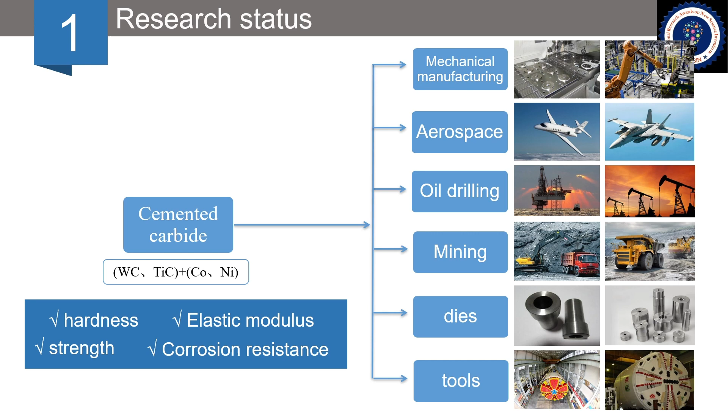Cemented carbide has the advantages of superior hardness, significant corrosion resistance, and abrasion resistance. Thus, it has been widely used in mechanical manufacturing, aerospace, oil drilling, mining, dies, and cutting tools. The rich tungsten resources provide an important resource guarantee for the development of the world cemented carbide industry.

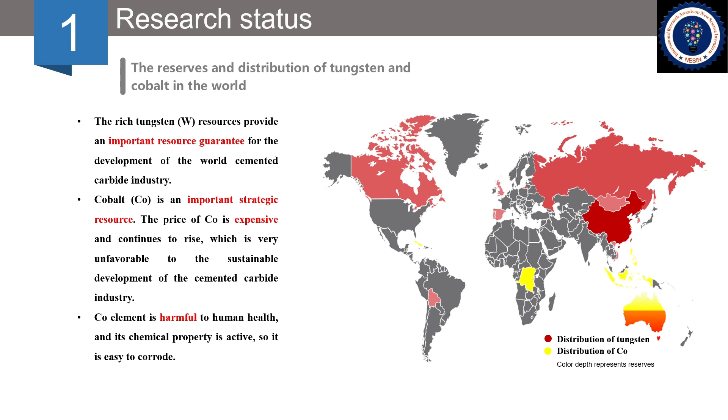But looking around the world, cobalt is an important strategic resource. The price of cobalt is expensive and continues to rise, which is very unfavorable to the sustainable development of the cemented carbide industry. And the cobalt element is harmful to human health, and its chemical property is active, so it's easy to corrode.

In order to solve these problems, tungsten carbide without a metallic binder phase was fabricated. Researchers added metallic carbides or metallic oxides such as titanium carbide, aluminum oxide, or magnesium oxide to the tungsten carbide matrix to improve its performance.

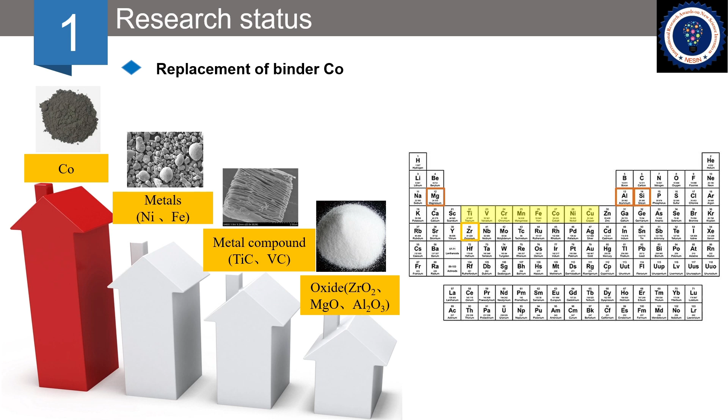It has been seen from this figure that scholars have gradually carried out research on substituting cobalt in recent years, mainly focusing on intermetallic compounds such as nickel aluminum, iron aluminum, and oxides such as aluminum oxide and magnesium oxide. Such research has been carried out around their mechanical properties and engineering applications such as cutting tools.

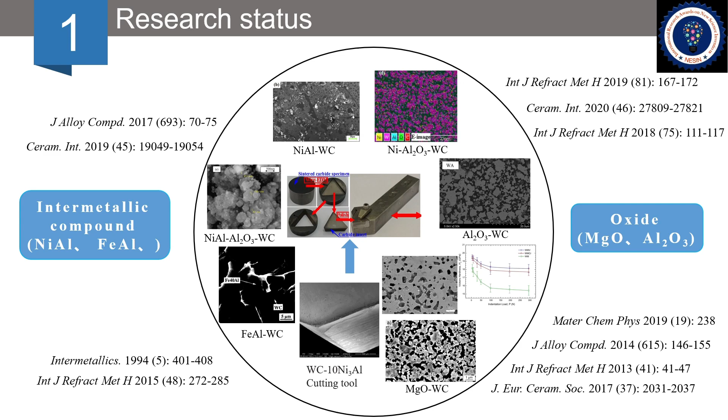For the preparation methods of composite materials, there are several main sintering processes as follows. Different sintering processes have different advantages and disadvantages as well as applicable materials, but to a certain extent, they can improve the density of sintered blocks, inhibit grain growth, and improve material properties. SPS is a superior technique for materials that are hard to sinter, such as ceramics, hard metals, metal matrix.

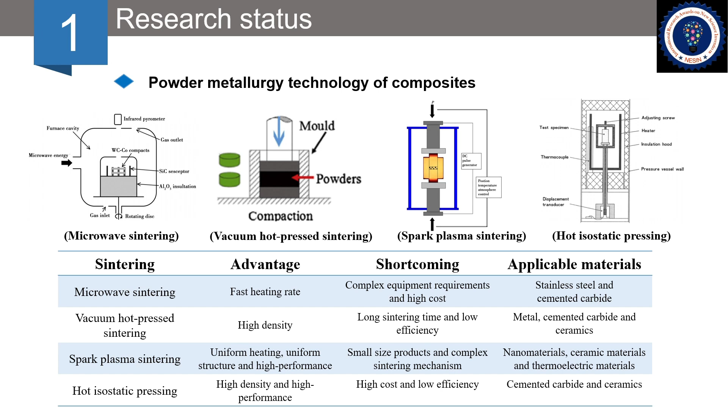According to the mass ratio of 10 to 1, the powders and cemented carbide milling balls were put into the container and mixed for 50 hours at 350 revolutions per minute in vacuum. Next, tungsten carbide and magnesium oxide composites are called WM composites for short.

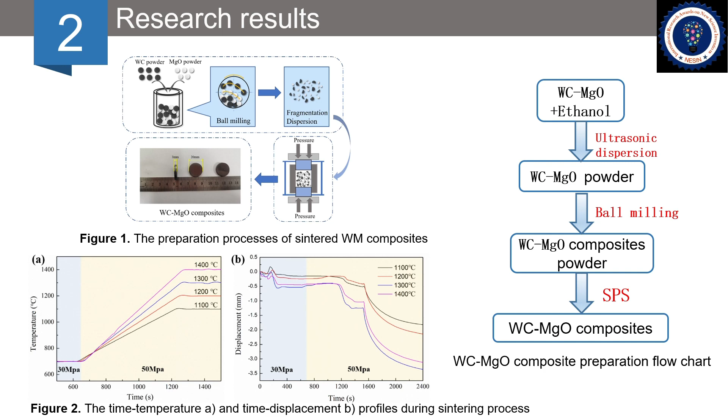SPS was used to prepare the compact WM composite under high vacuum conditions in the temperature range of 1100 degrees to 1400 degrees and the pressure ranging from 30 to 50 megapascals.

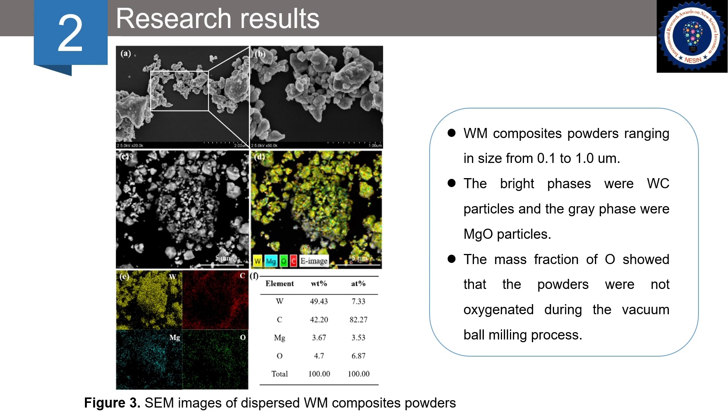Figure 3F showed the mass fraction and atomic percentage of 4 elements. It can be seen that magnesium and oxygen content were consistent with the experimental values. In addition, the mass fraction of oxygen showed that the powders were not oxidized during the vacuum ball milling process.

Figure 4 showed the X-ray diffraction patterns of A to D sintered WM composites with different sintering temperatures. According to Figure 4, tungsten carbide, magnesium oxide and the subcarbide W2C were detected in all samples. There was no peak of impurity phase, indicating that no significant reaction occurred between the tungsten carbide and magnesium oxide during SPS.

It was observed that tungsten carbide is the dominant phase from all the XRD diffractions. Meanwhile, it can be found that the amount of the W2C phase in WM composites increases with the increase of temperature.

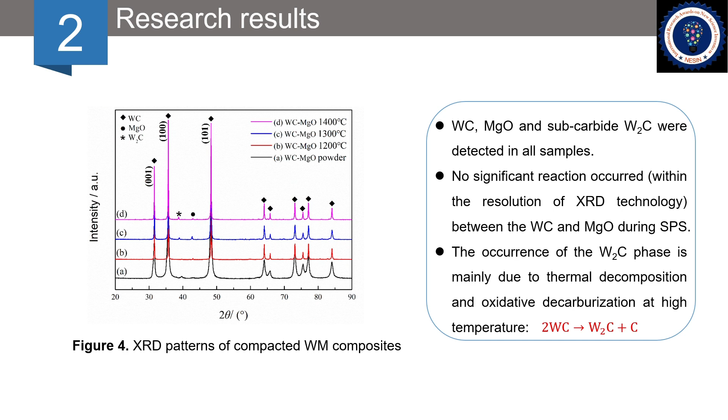The occurrence of the W2C phase is mainly due to decomposition and oxidation at high temperature by the following equation.

The formation of the fine grains may be related to the SPS process. Compared with traditional sintering methods, the SPS process promotes sintering of powder particles through electric discharge and spark plasma. Meanwhile, the applied extra pressure helps strengthen consolidation while limiting grain growth.

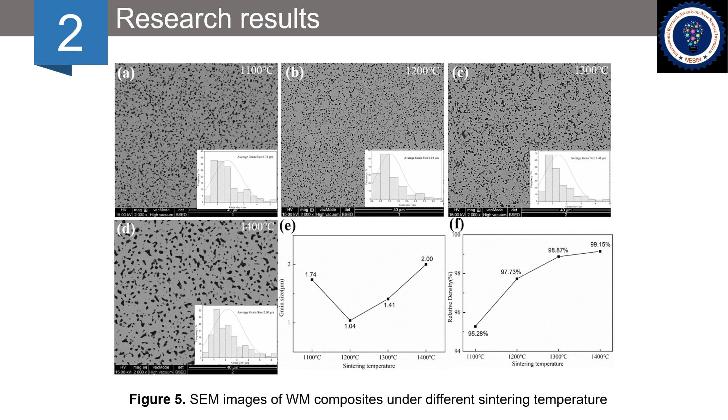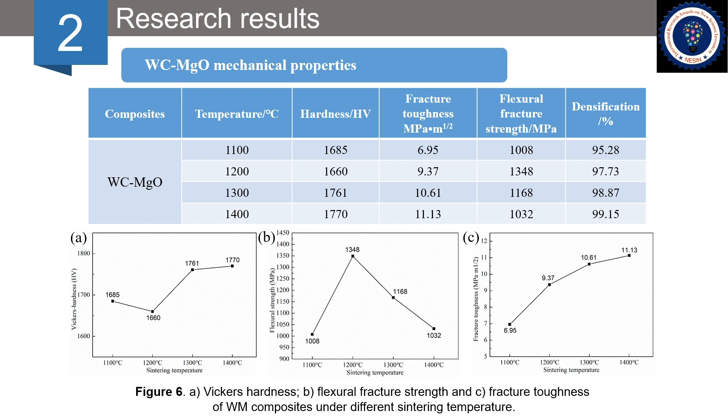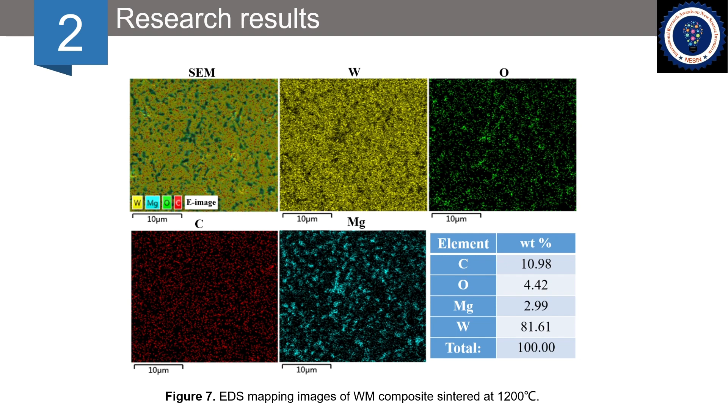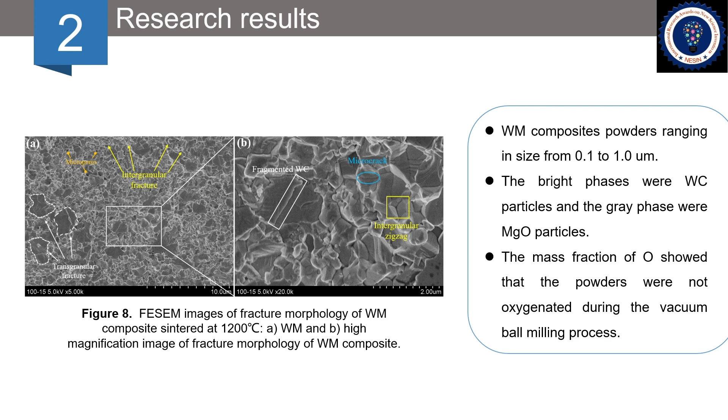The SEM image of the fracture surface of the WM composite is shown in Figure 8. From the observation of the fracture surface, the fracture mode of the WM composite is mainly a mixture of transgranular fracture and intergranular fracture. Hybrid fracture modes may be caused by local residual stress caused by thermal expansion. In general, the occurrence of the fracture mode was also associated with interface bonding strength, since cracks tend to propagate along weaker interfaces. Meanwhile, the occurrence of transgranular fracture in WM composites was also attributed to the uniform distribution of magnesium oxide that enhanced the interfacial bonding.

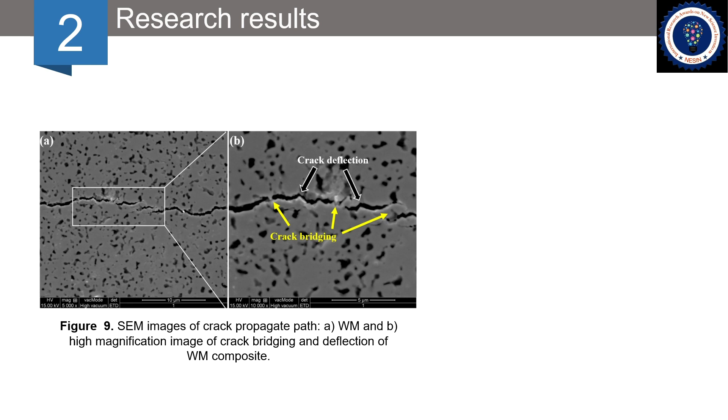WM powders were synthesized by high-energy planetary ball milling. According to the experimental results, the following conclusions can be drawn about the WM composites.